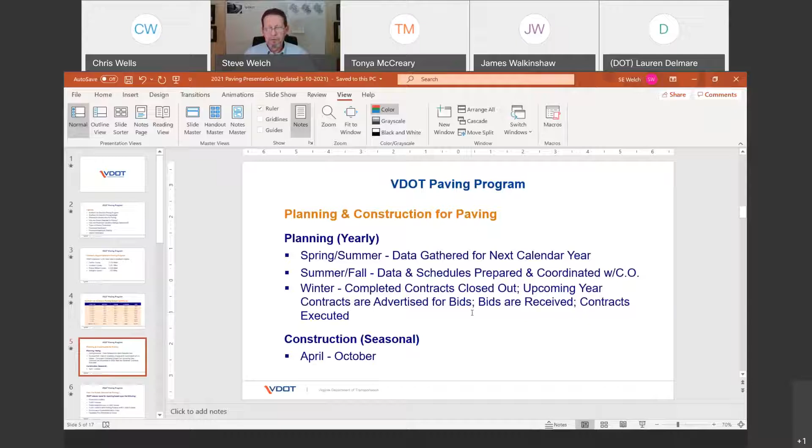So each year we start our planning about this time, gathering our data for the next year, because this year's already worked out. And so we're getting ready to get going here with a break in the weather in the springtime. Summer, fall, we begin data gathering and preparing schedules again for the next year. Then in winter, we're closing out the contracts for this year, and then we're advertising for bids, receiving them, and then we're executing the contracts. And we actually do that between January and April, and even sometimes as late as May. And that's because we release a whole bunch up front, and then we start releasing some out each month to kind of go through the season. Things may change sometimes. Our typical construction season is April through October with the weather, because pavement requires that.

So how do we select the roads for paving? We do that based on pavement condition, traffic volumes, our entire neighborhoods we look at versus just the main street sometimes. We try to avoid locations where we know, of course, there are existing VDOT projects or county projects, or one of the utility companies might be doing a gas line project or something like that that's going to cut into the pavement to begin with. So we want to avoid that.

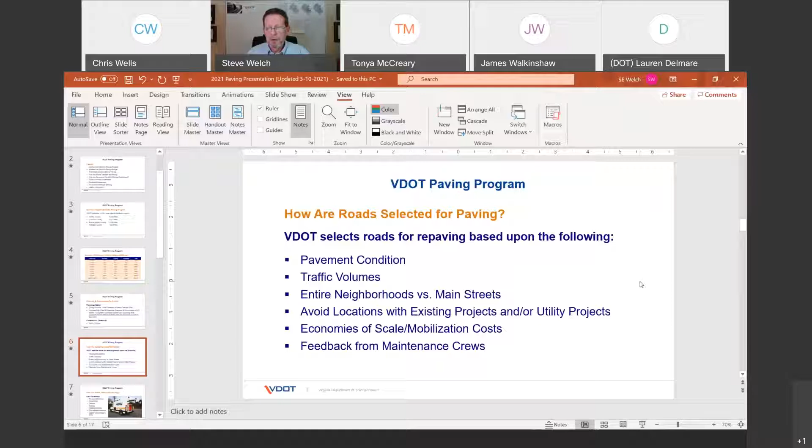Also look at economies of scale and regarding mobilization costs in particular. So when a contractor arrives at the scene, they have a tractor trailer with a carrier on the back and their equipment. They have to offload the equipment and store it on the site while they're working. A lot of times they'll mill and then move to the next street or the next neighborhood, that is. And sometimes we have 2, 3, 4 adjoining neighborhoods. Then we'll try to get those that are close to each other if the programming works out that way.

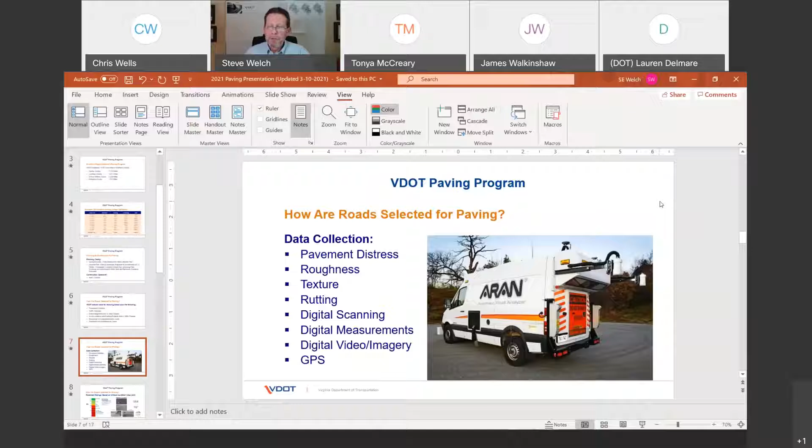So how are roads selected for paving with respect to data collection? We have contracts annually with a company that does that, and this is called an automatic road analyzer, ARAN, and it has equipment on it with cameras and sensors and other types of computer equipment. It measures pavement distress, roughness, texture, rutting, and the rest of the items you can see there, gathering that data for figuring out which roads we're going to pursue. And one thing I'll mention, because we get asked this, is every year the conditions change. We just don't know. With a freeze thaw and the expansion and contraction you get, roads change, so the ratings change.

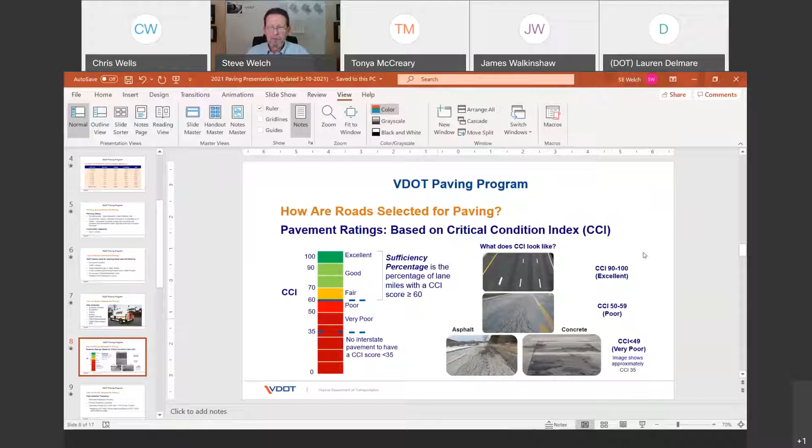So then we develop a rating for the pavement condition. That's 100 being the highest and 0, of course, being the lowest. But we have to maintain a 60 rating index. So wherever we see the very poor and the poor, we go after the very poor first as far as trying to get pavement done. Then if we have the funds available, which are all state maintenance funds, we go ahead and try to do some of the poor roads as well. But again, we have to do that annually, which leads to this slide.

Every year in the past, we've done the interstate roadways. We do this data collection annually, as well as on all the primaries. But if you saw earlier on the screen, over half the roads are secondary. So in the past, we've only been able to do 20% every year. So it takes 5 years to get 100% of the information, if you will, to know how good or bad each road is. But starting this year, for the first time, we're going to be collecting the data on every secondary road every year, as we do with the interstates and primaries.

So how are they selected with respect to traffic volumes? We have to maintain 82% of the network has to have a 60 or higher for the high volume interstate, primary, and secondary routes. High volume, of course, for interstate, and many of the primaries are high volume anyway. And then the higher AADT, or average annual daily traffic, of 3,500 or greater is what that means. And then we have to maintain a 75%, slightly lower, for the low volume primaries, and then a 60% of the low volume secondary routes. So you can see it's quite complex anyway.

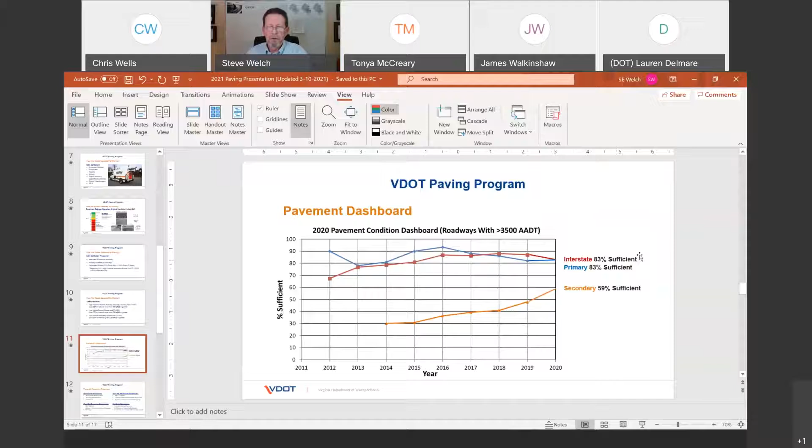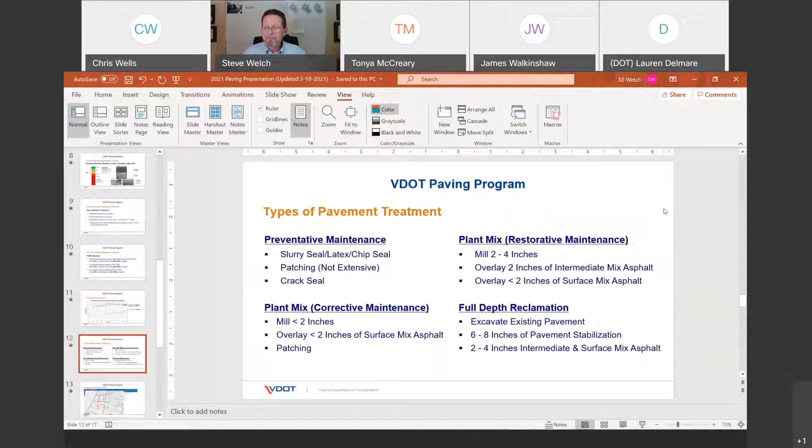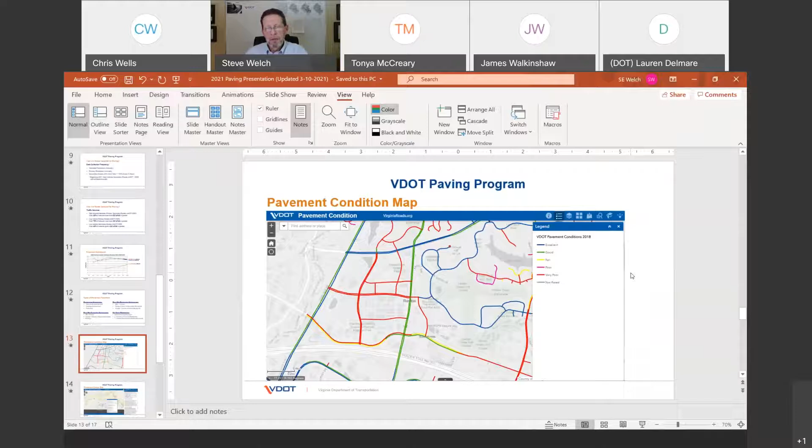And if you have a question about your road being paved, when it's going to start, or something that's going on during the process, you can email that project manager directly, and he should be able to give you a response. So unfortunately, one of the things we can't do is provide the final list of what roads are getting paved this year. We've had a little bit of a delay. It's not going to be published online until early to mid-April.

Right now, we still just have a preliminary plan statewide, and in part that is budget driven, with a rough February and maybe January too, with several ice and snowstorm events that we've had. I'm sure they're still working on gathering all the costs for those storms and weighing them against the funds available in maintenance to actually execute the planned 2021 plan that's available. And this is pretty typical of what happens each year.

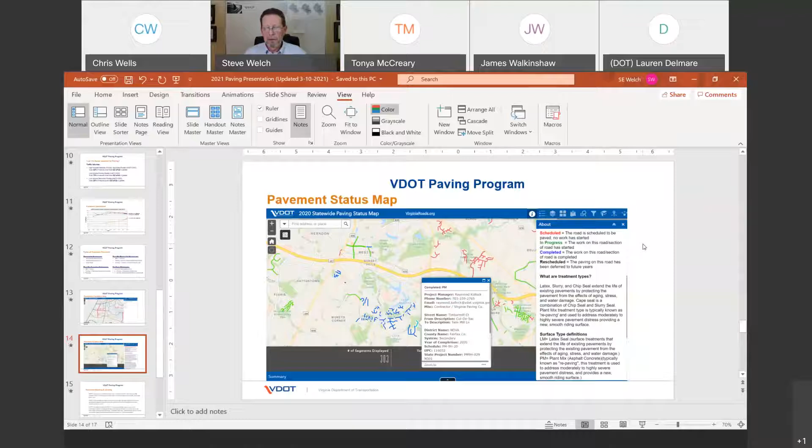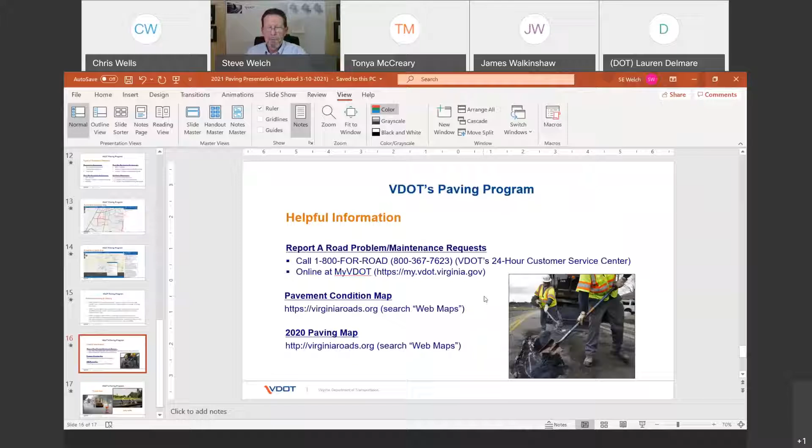So that's just a transition over into Chris's presentation, but if you have any questions anytime, you can call 1-800-FOR-ROAD or the number there, and more easily you can go on my.vdot.virginia.gov. And again, both the pavement condition map and the 2021 paving map will be out in early to mid-April, but that'll be coming up soon.

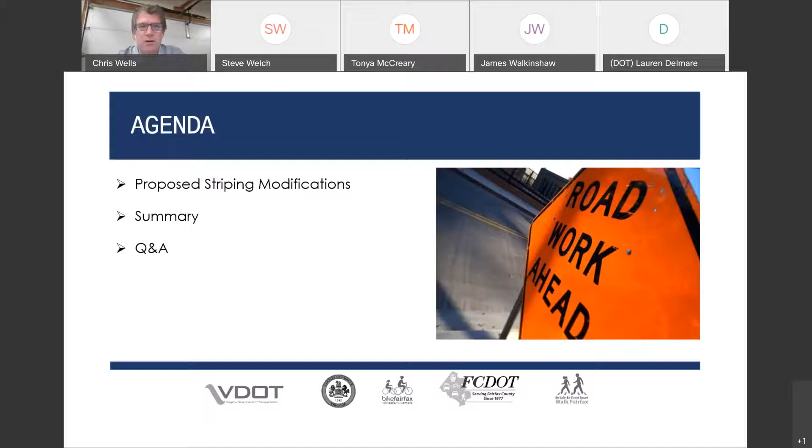Our role is to analyze the roads that are being paved and see if there's any opportunities for proposed striping modifications. And that's mainly if the road is excessively wide. What we're basically looking for is the opportunity, again, for the bike lanes or parallel parking striping, things that visually narrow the roadway and help with the speeding and driver behavior, because when a road is wide, a driver doesn't have to pay as much attention, and has a feeling of being able to drive faster. So we're looking to improve the community by doing this striping.

It begins with the idea of also expanding the bicycle network. Our county does have a bicycle master plan and certainly has lots of traffic. So anything we can do to get people to use bicycle trips will help reduce traffic. Also, we're shifting our focus, and I'll explain a little bit more of that later, where for many years we were just focusing on bicycle commuters, but it's a large county and it's hard to commute long distances by bike. But what we do know is that there's plenty of local trips that people can take by bike on a comfortable residential street, such as to shopping, to your places of worship, to schools, and to parks.

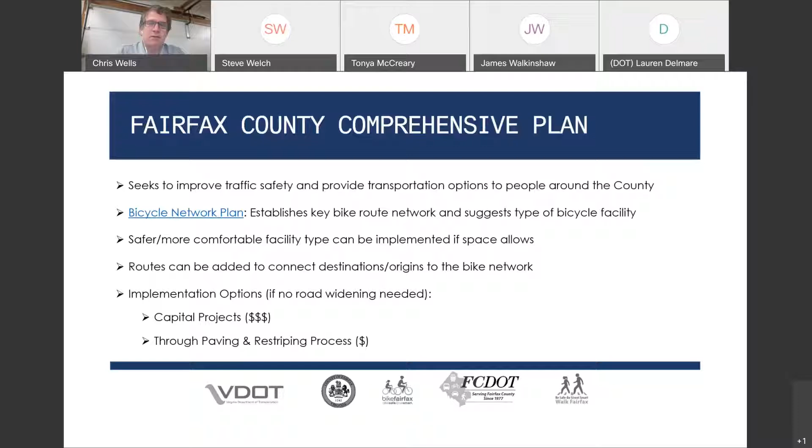So I've always described this as a good news VDOT story, because VDOT gets picked on for things like why wasn't my snow cleared, but this is really a positive where VDOT has stepped up and joined the county in doing the right public policy thing, and they deserve credit for bearing the costs associated with that.

So I mentioned earlier about bicyclists. For 40 years in America, the focus has been on on-road cyclists and traditional bike lanes, and that was actually a failed approach. Whereas in other parts of the world, they focused on off-road bike facilities because those were more comfortable for people to use—people of all ages and all abilities.

The average family with children is not going to be riding on a 45-mile-an-hour road with 40,000 vehicles a day with cars going right next to them.

The breakdown you see in front of you here shows that 53% of society is interested in riding a bicycle, but concerned about their safety and comfort. There's another group that is fairly enthusiastic—I'm sort of like myself, more like the weekend warrior, but I certainly do not feel comfortable riding on a high-speed, high-volume road. And then, of course, there's a part of society that has no interest in riding a bike.

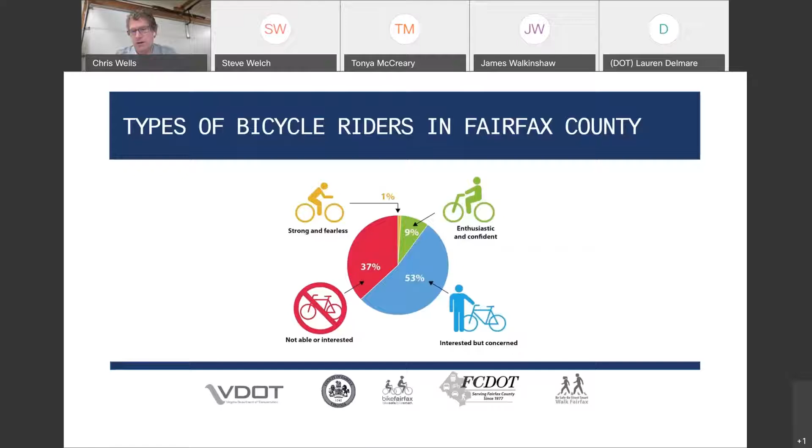But where we're going in the county is to try and move to more off-road facilities, just for this reason. We really do view the summer repaving process as a great opportunity to get facilities on residential streets, or interim facilities, where otherwise it would cost us a lot of money to try and build a trail.

So I mentioned the benefits of bicycling, and this infographic talks to that. The obvious one, top left, is that bike lanes increase the comfort for cyclists.

But in the middle top graphic, you see that when we introduce bike lanes, the exposure risk for pedestrians using a crosswalk or just crossing the street is lessened, because the cars are now moved into the center of the road. So there's that area where the bike lanes are not an area where a pedestrian's threatened.

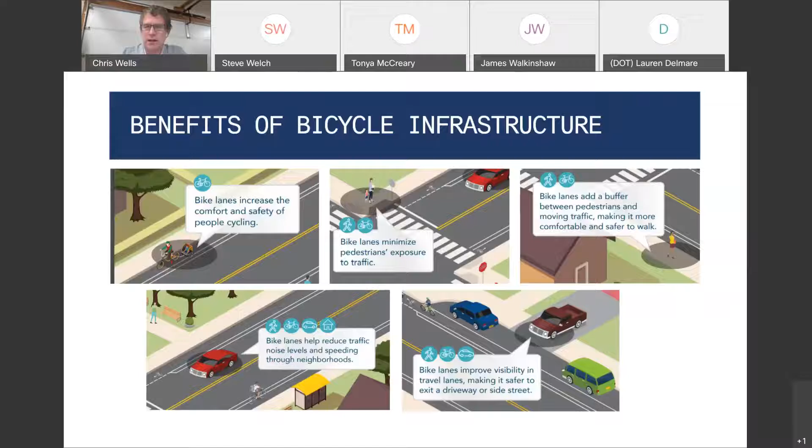And again, the impact on driver behavior and speeding is actually very positive.

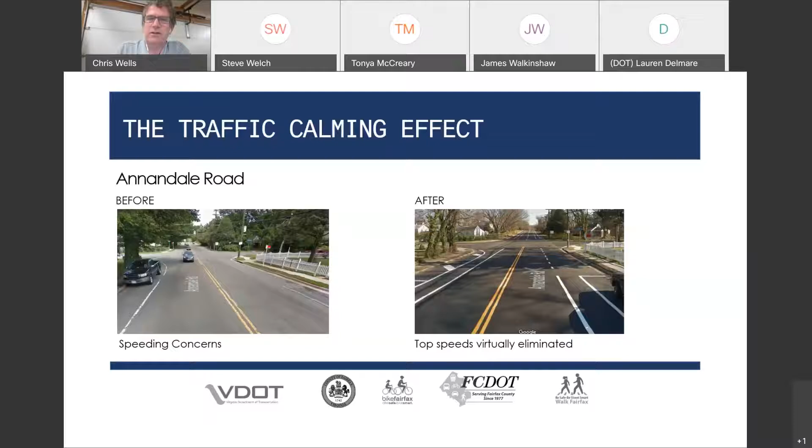So for tonight in the Braddock district, again we look at the draft list of roads that are being paved. We look at what roads may be out there that are wide and could benefit from these restriping proposals. We have 2 roads in the Braddock district this year: Commonwealth Boulevard and Government Center Parkway.

I should point out that this has been going on for years. In Braddock, I'm sure you've noticed the striping on Sideburn, or out at Government Center Park near Commonwealth, and out in the Government Center Parkway area on Post Forest Drive and Ridgetop Drive. So as each of these paving seasons goes by and a road is paved, we're successfully building a network for bicyclists, as well as providing these traffic benefits.

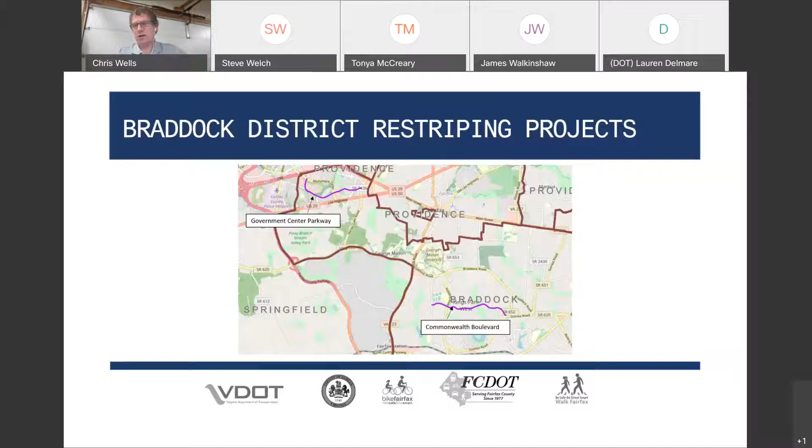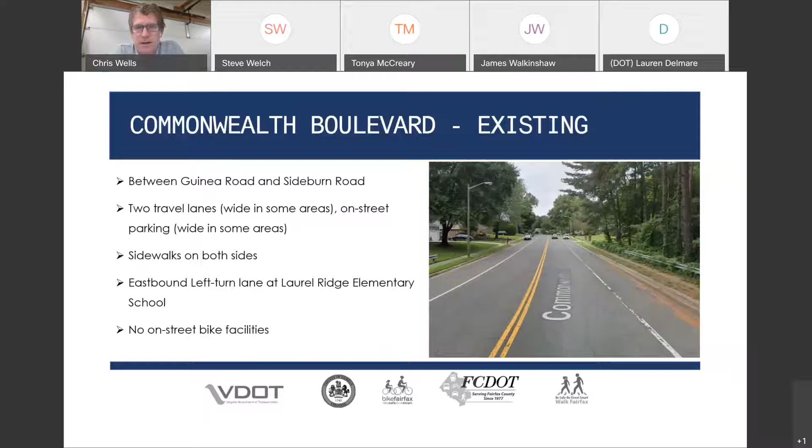So Commonwealth Boulevard, this is the existing slide. Commonwealth between Guinea Road and Sideburn is essentially 2 travel lanes with on-street parking in both directions, has sidewalks on both sides, and is striped for an eastbound left turn lane into Laurel Ridge Elementary School, with no bicycling facilities.

The proposal would be to add a bike lane in the eastbound direction by narrowing that travel lane, maintaining the legal parking, but there's not enough room for 2 bike lanes. So we would use the Sharrow markings in the opposite direction.

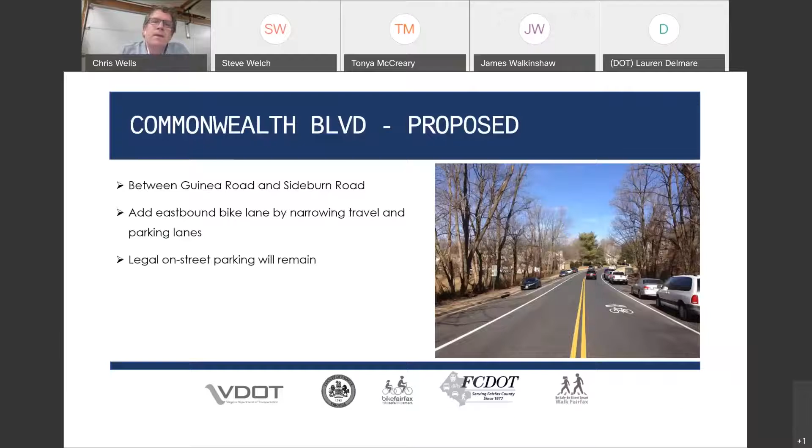Moving on to Government Center Parkway. It's a 4-lane divided roadway, which was our typical way of building roads as development occurred in the 70s and 80s. But you really don't need a 4-lane roadway until the daily traffic is 20,000 vehicles a day.

For our purposes in our county, we give ourselves a little more buffer, so if a road is 15,000 or 12,000 vehicles a day or less, we consider it a good candidate for a road diet. Here on Government Center Parkway, there's only 5,500 vehicles a day, so it's way below that threshold. The road is over-designed, and a 4-lane road, even more so than a wide 2-lane road, lends cars to speed and allows aggressive drivers to pass, so it can be not what a community is looking for.

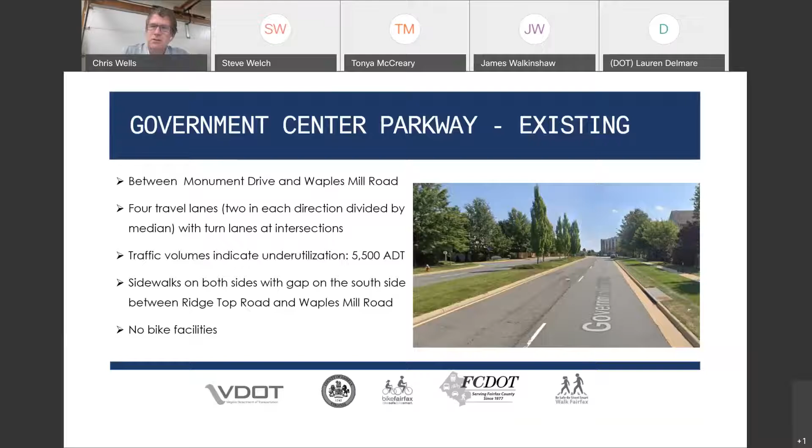There are sidewalks on both sides, except for a small gap between Ridgetop and Waples Mill, and there are no bicycle facilities. So what we propose to do on a road like that is convert that rightmost lane into a buffered bike lane, so that Government Center Parkway would become a 2-lane road with a buffered bike lane. That gives us a safe bicycling facility, and brings the road into a better character for the uses around it.

Government Center Parkway is, as the name implies, where the Fairfax County Government Center is. Along a portion of it is the large government center, which today has a parking lot, but the county is looking at building workforce residential housing, converting some of that to residential, and the rest is actually very residential with higher density multifamily dwelling units. So there's certainly a lot of people that walk and bike and get around that area.

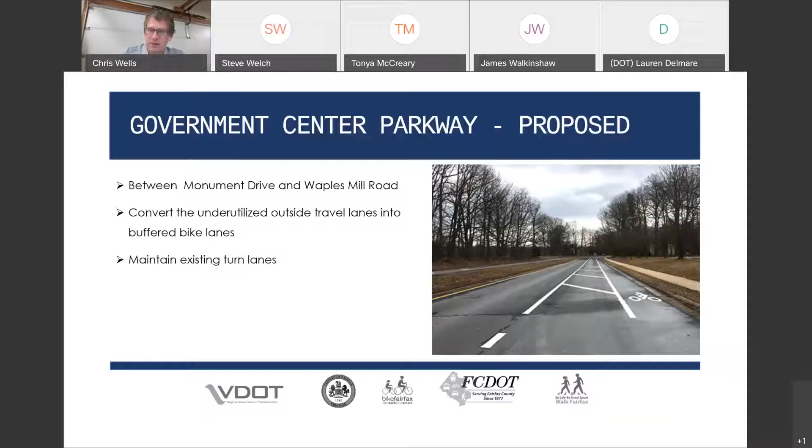The other thing I mentioned earlier is pedestrian safety. As our collaboration with VDOT has improved over the years, we've been able to focus on the pedestrian safety opportunities that go along with this restriping. As staff, we review the existing crosswalks that are out there, and we typically propose to upgrade them from the parallel striping to the high visibility block pattern.

A big purpose of us having this meeting tonight is to get your input as the communities that live around these roads. As professionals, we can look at them and come up with our observations, looking at things like pedestrian generators such as schools, parks and pools. But we would very much welcome your feedback if there's a location you've thought for a long time could benefit from a crosswalk. I should say we can't promise we'll be able to do one; we still have to meet engineering standards.

You don't want to overuse crosswalks because then they can lose their effectiveness for drivers, and they need to be engineered correctly. We also don't want them to give a pedestrian a false sense of security. So there's a trade-off in a residential situation, where you'd think drivers would expect, in Kings Park West for example, to know there's people walking around and to be alert for pedestrians. So we can't put them everywhere.

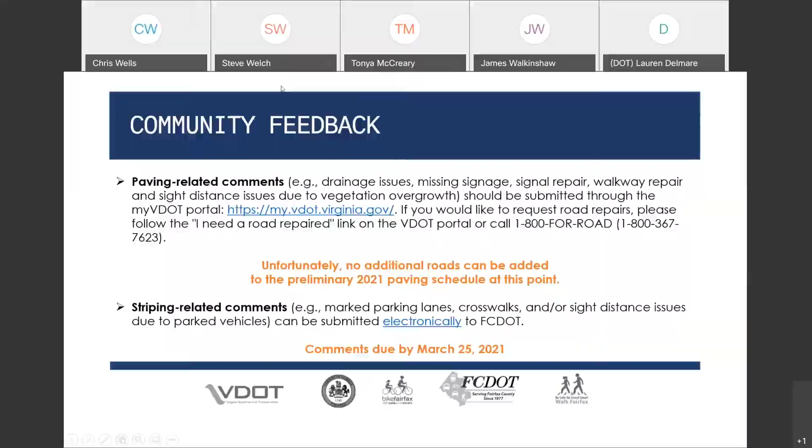So again, I really do want to thank everybody's participation. This is what I do for a living, but out of 1.2 million people, we really appreciate folks taking their time to help improve the community and give us feedback. And we do want your input. So if you don't like it, please let us know. If you do like it, you can let us know too. What we're really hoping for is to improve upon something that we may not know. So if you see that we may have missed something, or that we need to tweak something, you have some local knowledge that can benefit us, we really would appreciate it if you contact us and let us know.

So Chris, I have one more question. Oh, sure. Who has responsibility for the sidewalk on Roberts Road over Rabbit Branch? I can try and look it up. Is Rabbit Branch between Commonwealth and what is that? Just south of Commonwealth. I'm drawing a blank on the name there. Right by Robinson. I can look it up as well. Yes, she says yes. That's the location.